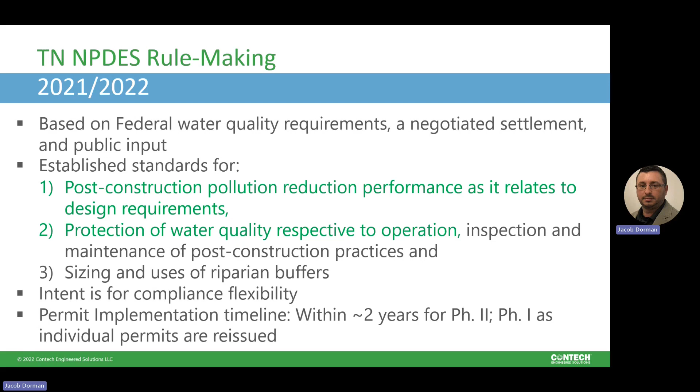As we start to get into what is in the permit rules, it's always helpful to understand what the agency's expectations are. We have some assistance readily available in that the Tennessee Department of the Environment and Conservation released their draft permit rationale with the draft permit in 2021 that provided some clarifying language related to stormwater control measures and how they can be classified, because how an SCM is classified is critical moving forward.

So instead of leaving things up for individual permittee interpretation, we can go directly to the permit rationale and establish where TDEC's expectations are. For this presentation and for designs moving forward, the key to keep in mind as it relates to the various SCMs available is that the vast majority of them can be classified by the treatment process on which they rely. That's why over the next couple of slides, we are going to take some time to dive deeper into how various categories of SCMs are intended to function, better understand those processes so that we ultimately know how they can be classified moving forward.

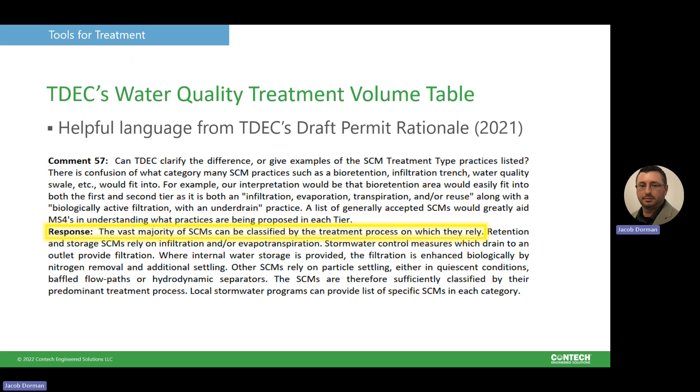And so that brings us to the water quality treatment volume table. This is a critical new piece of information that is included in the new NPDES rules. And not only does it establish the types of treatment, it also clarifies that there is a new statewide design storm, and that's going to be the 1-year, 24-hour design storm.

The design storm is variable across the state and is going to be dependent upon individual rainfall characteristics of each site. When Chris presents here in just a little bit, he's going to go into great detail on how we go about using that information. But I wanted to point out as part of this slide that we have now an established storm, the 1-year, 24-hour design storm, and that is going to be the storm we utilize to generate the amount of water quality volume that's required to be treated.

So how are we supposed to interpret this table? I like to think of this as a menu. As a dad of 3, we occasionally go out to dinner, and it never fails that not a single one of the children wants the same thing. That's really how we need to think about this treatment table. It's a menu. When our site allows us to do one thing, we can pick whichever treatment type works for us. When we run into site constraints, we simply have to choose from a different part of the menu.

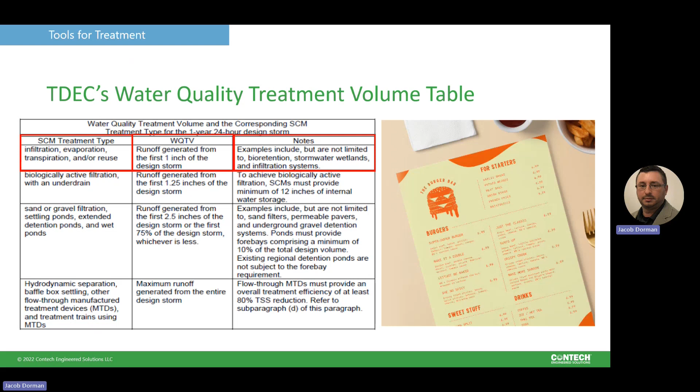Again, the takeaway here is that if your site has constraints that wouldn't allow you to use category 1, just the first category there, infiltration, evaporation, transpiration, then you simply choose a different category to pick an SCM from. You're going to have to deal with slightly different volumes, but it's not as if you don't have options when you run into certain site constraints. I think it's a really critical part of this table that we need to keep in mind.

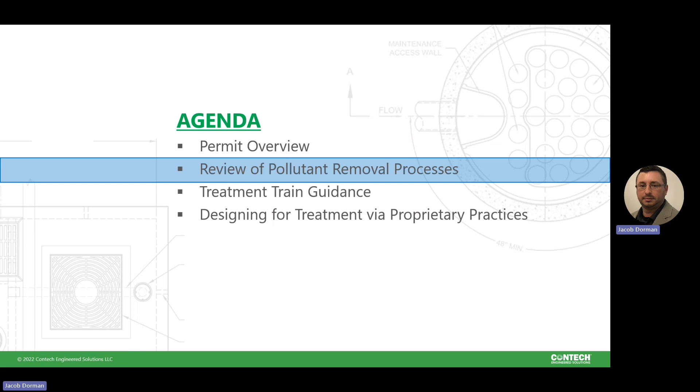So now that we've talked about some critical aspects of the permit, I think it's important we talk about how we go about removing or reducing pollutants. So let's now talk about the processes associated with the treatment volume table. So in this category, category 1, infiltration, evaporation, transpiration, and reuse. That's what we're going to be talking about now.

So this is a category that really mirrors sort of a natural water cycle. And what do I mean by that? The processes deployed in this category very much mimic what happens in nature. There's infiltration again - how are we getting runoff back into the ground? There's evaporation and transpiration, or ET - transforming that liquid runoff into a different state, meaning how are we getting, say, through the use of vegetation, runoff back into the atmosphere? This is water reuse, so we're reclaiming the use for something else beneficial.

And then another sort of good rule of thumb for this category is this is really sort of a capture category, more along the lines of a hydraulic or hydrologic process, in that there would be, using SCMs in this category, no discharge of runoff from your site when you're treating that first 1 inch of runoff. This makes practices that fully infiltrate a preferred first line of defense against polluted runoff. 100% of pollutants in runoff fully infiltrated are retained on site. This is the most effective way of eliminating runoff and addresses both water quality and water quantity concerns.

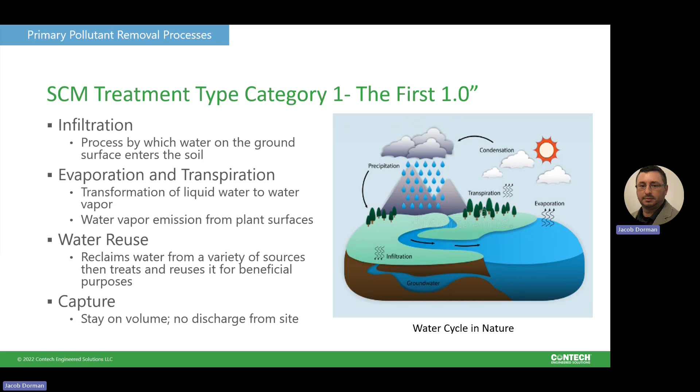So we wanted to take a second to also highlight what the dominant process within each of the categories is. So here we have infiltration. Within that first 1 inch category, infiltration is going to be the process that influences the runoff volume the most.

So what are the various influences on infiltration? The amount of precipitation that has fallen is an influencing factor. Whether the underlying soils have been compacted and have capacity to infiltrate the runoff we're putting through the SCM is a component that influences infiltration. The slope, so how fast runoff moves across a surface intended for infiltration, is a contributing factor, as well as land cover.

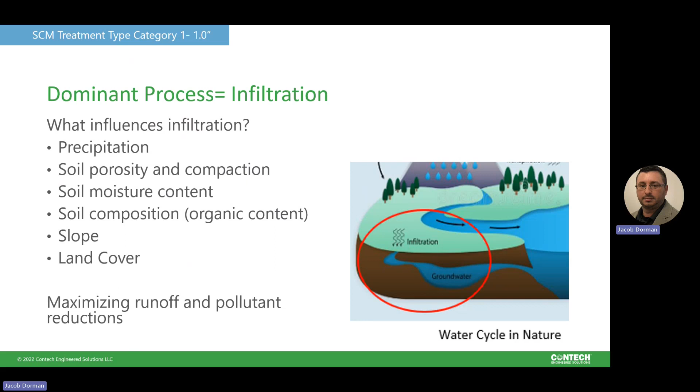Generally it's particularly influential if this is a redevelopment site, and if the land cover was previously something impervious, and we're trying to put an infiltration practice there, that prior impervious nature of the underlying soils is going to impact the ability of an infiltration-focused practice to function. At the end of the day, infiltration is primarily intended to maximize runoff and pollutant reductions, and where it's feasible, it makes a lot of sense.

So what are some key considerations when we think about applying infiltration practices on our site? The underlying soils must be capable of accepting the entirety of the volume that we're sending to that system. So we need to test for infiltration capacity under fully saturated conditions, and we want to avoid infiltration where underlying conditions of the soil affect its ability to accept infiltration.

We want to remove large sediment and trash prior to it entering an infiltration system, so we want to really pre-treat these systems. This is not only going to improve the longevity, but it's going to protect that filter media that treats the runoff before it infiltrates, because that media can occlude, and we want to extend its life cycle as best we can.

There are many studies out there that show how vegetation, again that ET aspect, helps with not just media infiltration rates, but also by breaking down and creating habitat along the root systems for microorganisms to live. What those end up doing is creating cavities inside of that media that help improve the infiltration rate.

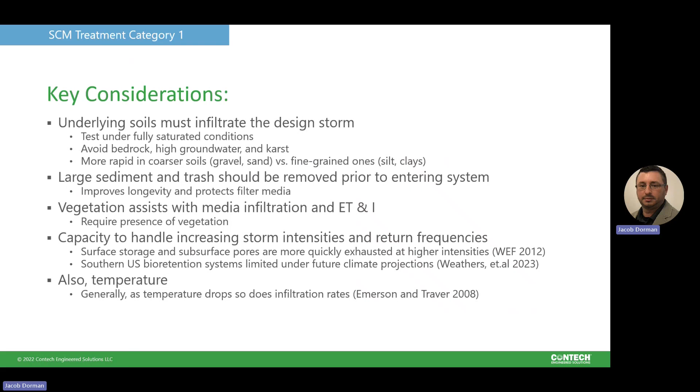We also want to be thinking, maybe not as the most critical feature of all this, about the ability of these systems, specifically infiltration-based systems, to handle future storm intensities and return frequencies. There's a great deal of new information out there that we're not going to talk about as part of this presentation, but that we'd encourage you to look at, that talks about how the southern United States is impacted under future climate conditions and what that may do to some of the SCMs we're selecting today as we look into the future.

So what types of systems or SCMs are we going to see in this category? This category is going to include bioretention without an underdrain, because we want to fully recharge that design volume. So this is essentially a 100% water quality volume.

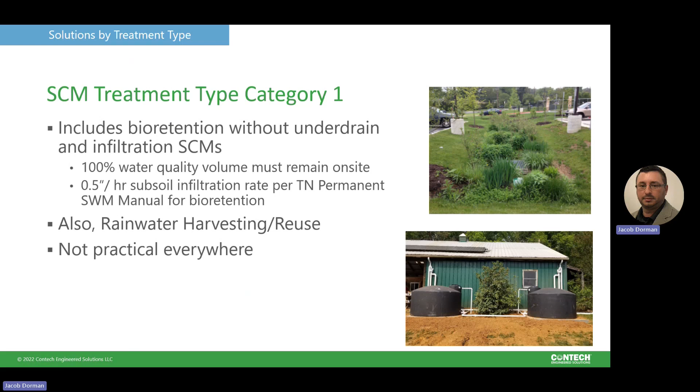We are also going to see rainwater harvesting and reuse in this category. And we need to recognize that while this may not be practical everywhere, we are not discouraging the use of infiltration type systems. We simply believe these systems are appropriate where the underlying soil conditions support their use. And if you run into a design situation where you cannot infiltrate, you are not penalized under the new permit. You simply select something from one of the other categories.

So let's move forward with looking at another category. This category is going to be biologically active filtration with an underdrain. It's a very specific category when you think about how the rest of them look. In this category, you are required to treat the runoff generated from the first 1.25 inches of the design storm.

Again, all of these are equal from a menu perspective. These are all entrees, and so this would be just simply, instead of steak, this is chicken. So what does this category discuss?

So what is the first 1.25 inch treatment category's primary process? In this instance, we're going to be looking at a filtering process that mixes some chemical and biological functions in there, which we'll talk a little bit more about here in just a second. But in all practical purposes, this means this is going to be bioretention that doesn't fully infiltrate. So in this instance, these are going to be bioretentions that have underdrains.

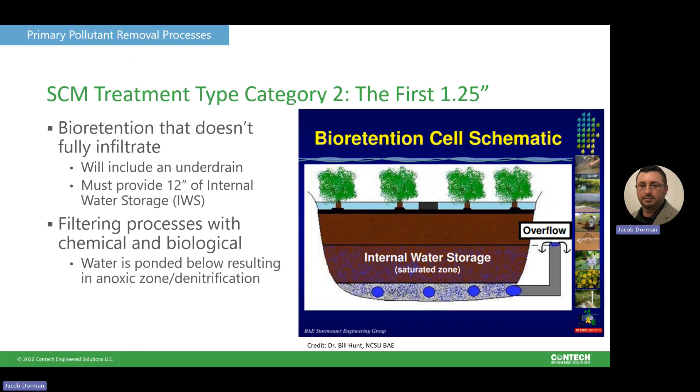The dominant process within this category is biologically active filtration, so we're not necessarily infiltrating the entirety of the design storm here. The primary mechanism for flow out of this system becomes this L-shape underdrain. So what are the things that influence the effectiveness of this biologically active filter?

The engineered media composition becomes critical. We need to do a good job of QA, QC-ing this media, because how well runoff flows through it and how quickly it gets to that internal water storage zone is helpful. The other piece of this is the depth of that internal water storage zone.

Another critical element within this category is the need for a vegetation or soil component. We've got to make sure that we have bio in the biologically active filtration.

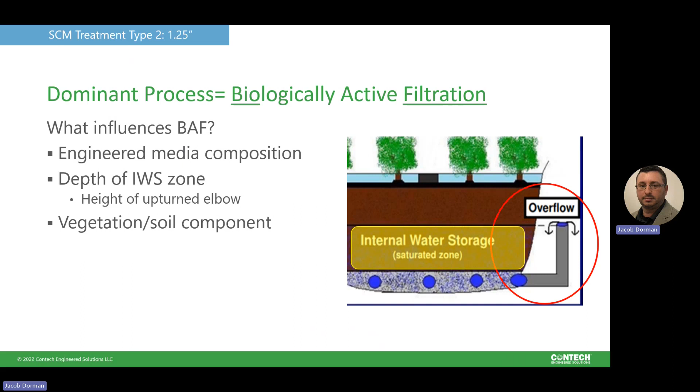So there's a couple of key pieces from a process standpoint that we wanted you all to keep in mind. The primary considerations here are going to be your media infiltration rate. We need to understand that that's relatively low for non-proprietary systems.

This is one where we start to see some proprietary systems, like some of the biofilters that manufacturers like Contech, being allowed because of their primary pollutant removal processes. Their flow rates are going to be much higher. The benefit of a proprietary system within this category is there's a fair amount of QA, QC in excess of what you typically see for non-proprietary systems, and that helps ensure that when those systems get installed, the media flow rate operates as expected.

There's also going to be a presence of vegetation or soil. There's that ET and infiltration benefit associated with that, as well as, like I described with the last category, you create preferential flow paths and microorganism habitat along the root zones of the vegetation. That is really critical to ensuring the media operates as expected.

There are distinct wet and dry zones within this category. The upper portion has to dry out between storms to be able to accept the next storm, which means we have to ensure adequate depth of that filtering media, because the wet elevation is set at the top of the invert for the upturned elbow, and everything below that remains wet.

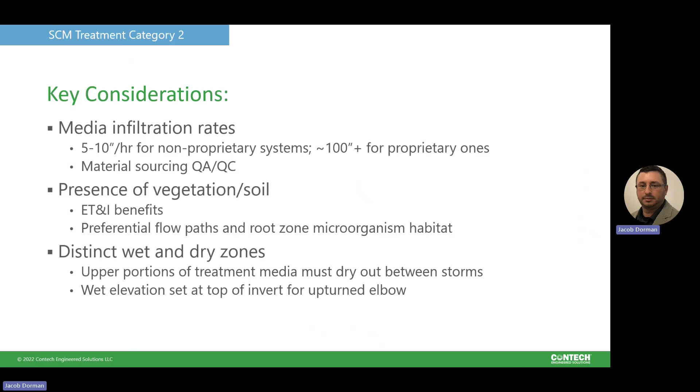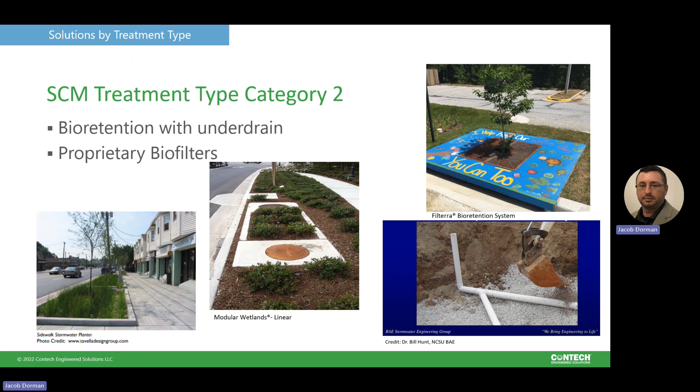So what are some examples of systems we may expect to find within this category? We're going to have bioretentions with underdrain, like you see in a sidewalk planter on the left, as well as several proprietary biofilters depicted in the center and on the right. We also wanted to include a picture of an upturned elbow in case you weren't familiar with it, so you could see how it's oriented and how it differs from a traditional straight pipe-out underdrain found in some current bioretention designs.

So let's move on to the third category. This is one where multiple processes are being deployed. This is the first change we see in the water quality treatment volume, in that this category is the first 2.5 inches of the design storm, or the first 75% of the design storm, whichever ends up being less. As Chris is going to demonstrate, that becomes pretty critical when we start thinking about the types of practices we deploy within this category.

But there are a number of examples in the notes section that should be referenced to understand what type of systems get included here.

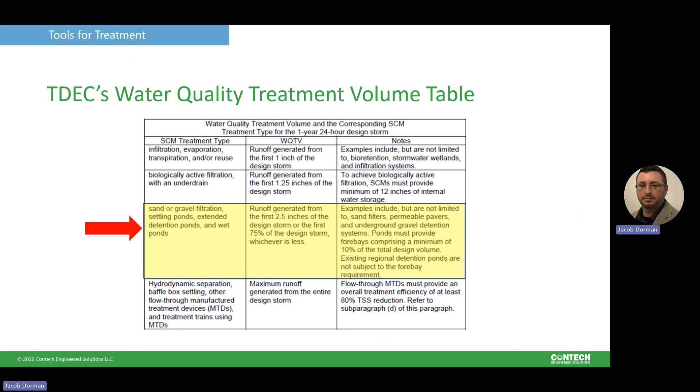So what is the treatment type category being deployed? There are actually two dominant processes deployed within this category. First, we have sand or gravel filtration, a process in which solids are reduced by a medium, generally a media blend or a membrane. And we also see that ponds end up in this category.

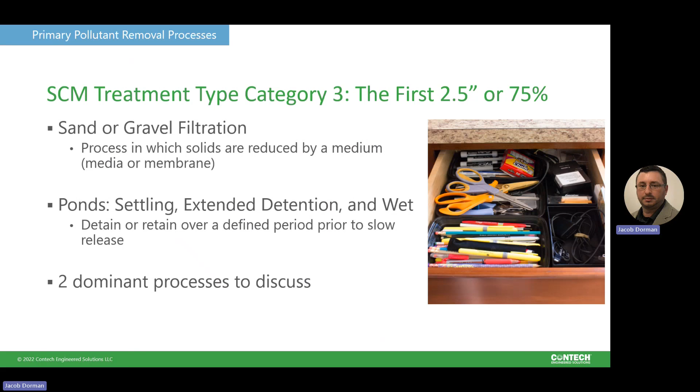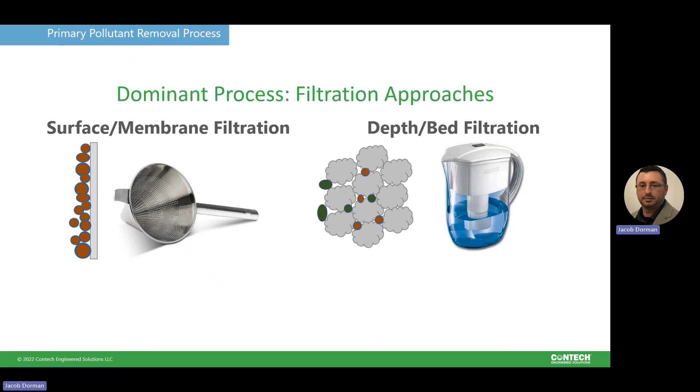On the right is depth or bed filtration, where the filtering happens inside the media matrix. There's interstitial space in there that sediment gets collected. Both of these can have high surface area, and that allows you to have some flexibility in your designs. So what are we talking about really when we're talking about these two types?

So what's a more detailed understanding of these? Inside this physical straining or filtration, we're going to have sand filters and perlite medias. We're also going to have membrane filtration - again, providing an inert physical barrier to collect solids. From a functionality standpoint, sedimentation plays a big role in the filtering effectiveness.

And what do we mean by that? The filter surface is going to have the sediment hit up against it, and that sediment then drops down to the bottom of the filter. Because sedimentation is playing a role, and this is an inert filter, we get really good results and control of solids and the pollutants that end up being attached to those - things like metals and total phosphorus.

What we don't get out of these systems, because it's inert, is there's no reactive media component, so we don't see a lot of dissolved or soluble pollutant removal in these. And like anything else, but specifically related to filters, longevity needs to be considered. We know all SCMs are going to need maintenance - all filters eventually occlude. It's important to understand the function of those filters so we know how and what role longevity ends up playing in these types of systems.

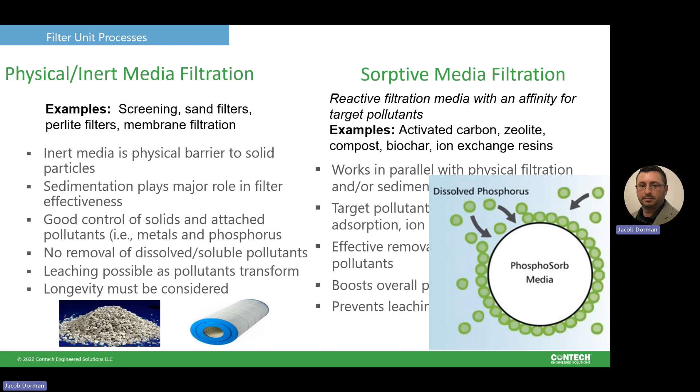This allows us to target the dissolved fraction of the pollutants we're trying to reduce, and it can often act as a polishing filter at the end of a treatment train to grab that other half of the pollutant. So we've got the particulate taken care of from the physical filtration side of things, and sorptive media can act as a standalone but can also boost that overall performance. An example would be Contech's PhosphoSorb media, which allows us to target the dissolved phosphorus fraction.

So what is the other dominant process at play in this category? When we're thinking in the pond sense, that dominant process ends up being sedimentation - reliant on gravity and time. That's why if we want more contact time for the volume of runoff we're containing to be in a pond, our pond gets bigger. This is characterized by Stokes' law.

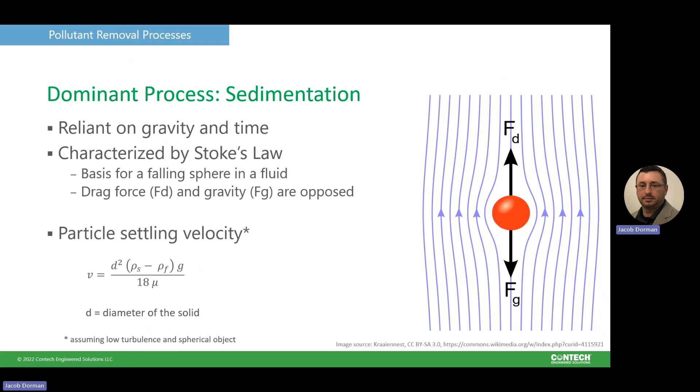How does a sphere fall out of the water column, essentially. That's really all based on how quickly the particles will settle, and that's going to be based on the size of particle we have in the system. So what are some factors that affect the ability for SCMs in this category to filter and settle? The contributing drainage area can be a factor - we don't want to overload our filters.

There's a general rule of thumb of about 5 acres for filters. We can handle more drainage area for ponds—ponds get bigger the larger the drainage area they serve. Both of these have distinct surface area needs. From a filtering standpoint, that surface area, while large overall, comes in a compact form, whereas with a pond we need a larger surface area, which generally means more land needs.

The type of media we're selecting has a significant effect on how effective these filtering practices are going to be. We need to make sure we can maintain these systems—all SCMs are going to need maintenance. All filters clog eventually, all ponds eventually fill up. We need to be able to assess or access these systems, and we want to think about how we can extend their life cycle. We have pretreatment needs associated with both practices that can help with that.

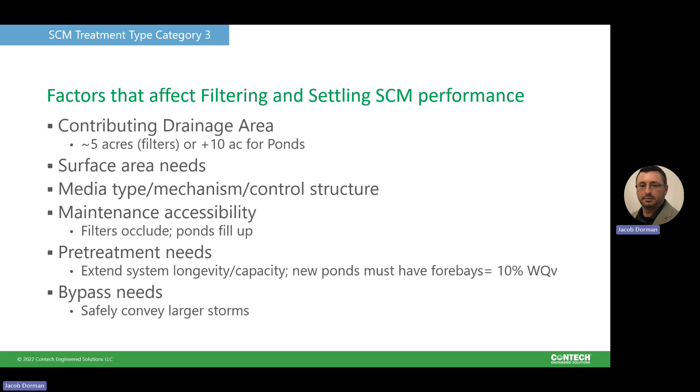In this example, the new rules actually say a pond forebay must be 10% of the water quality volume. So we're going to see manufactured proprietary systems, and we're going to see ponds with forebays as part of this category.

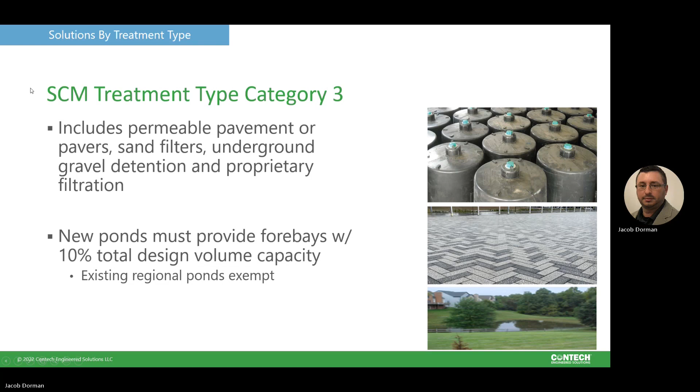Lastly, under this category, we're going to be looking at hydrodynamic separators—this falls under category 4. We're going to treat the max runoff generated from the 1-year storm. This is not all manufactured systems; this is a very specific type within the manufactured suite of products.

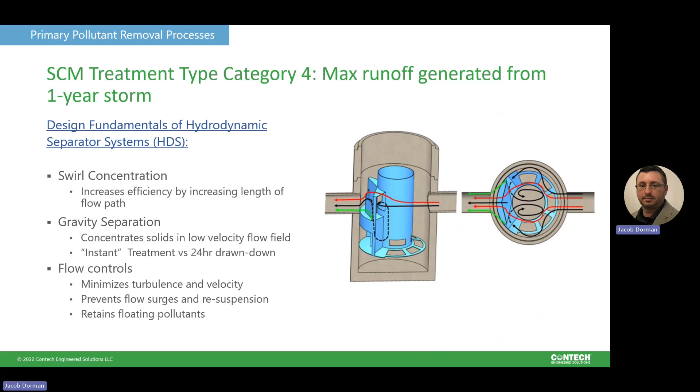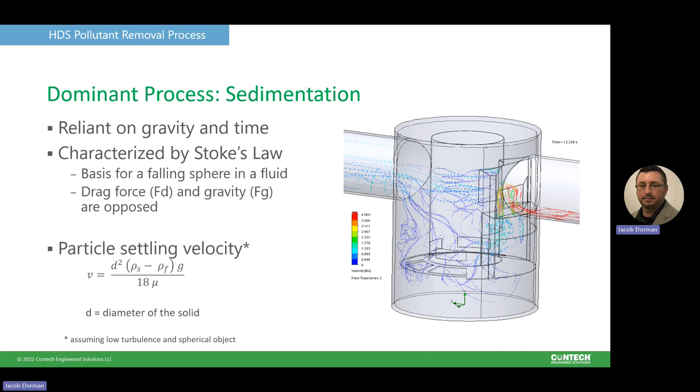What are some of the factors that affect HDS performance? First, we want to make sure these are tied to an appropriate flow rate—we don't want to undersize these systems. All of that should be tied to some kind of performance testing, and the rule reflects the need for an industry-wide standard to be used. Sediment particle size also affects HDS performance: these systems are really good at large sediment removal but less efficient at finer sediment.

Residence time becomes a pretty critical factor in all of this. The longer you can make the flow path, or the more time the sediment has in the system, the more sediment can actually fall out. We also want to make sure these systems have passed some kind of scour test, so we don't resuspend and potentially lose captured sediment.

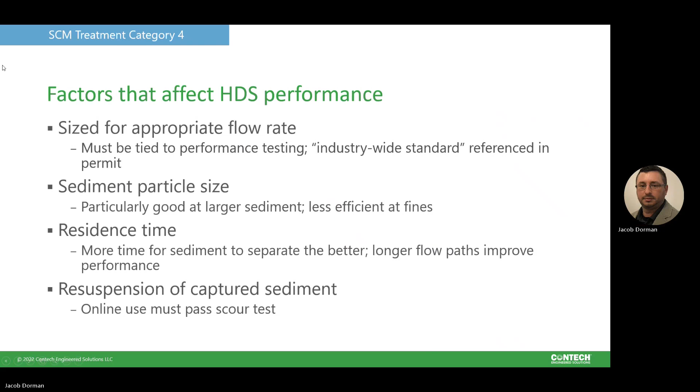Another key piece of this category is that if you are utilizing an industry-wide standard as required by rule, TDEC has defined an industry-wide standard as either the program from Washington State, the Technology Assessment Protocol Ecology, or the certification program from New Jersey, the New Jersey Department of Environmental Protection's certification. Those have a ceiling of 50% for these types of practices, which would keep them below the minimum 80% requirement and therefore not allowed to be used as standalone systems.

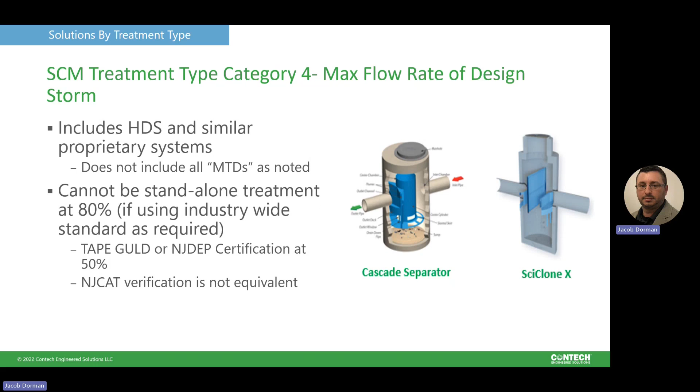We also want to talk about treatment train guidance here. This is particularly important as we talk about how we're going to use hydrodynamic separators moving forward. This is that fourth category. By rule, we have a minimum of 80% TSS that we're trying to achieve. That is now the rule, but that's kind of the target. And this treatment train using HDS describes how you can achieve that.

The key consideration is that distinct unit removal processes are needed to create effective treatment trains. That means two of the same HDS systems in sequence are not going to create additional performance for your system. Good engineering practice should prevent two HDS systems from being lined up to try to achieve this treatment train result for 80% TSS. In fact, if you went so far as to try that, you would actually need 3 HDS systems. But again, that's not the intent of the rule, nor is it sound engineering practice. We need distinct unit removal processes to create effective treatment trains.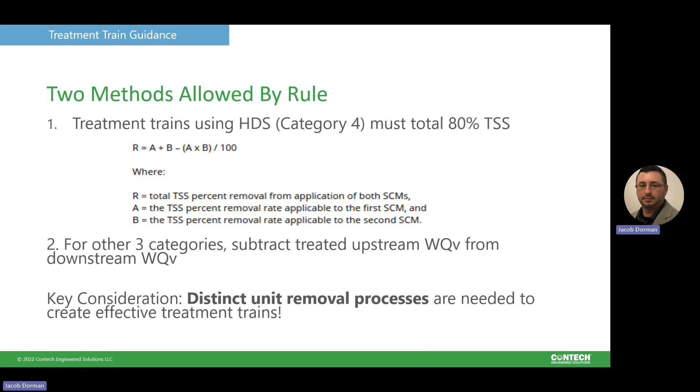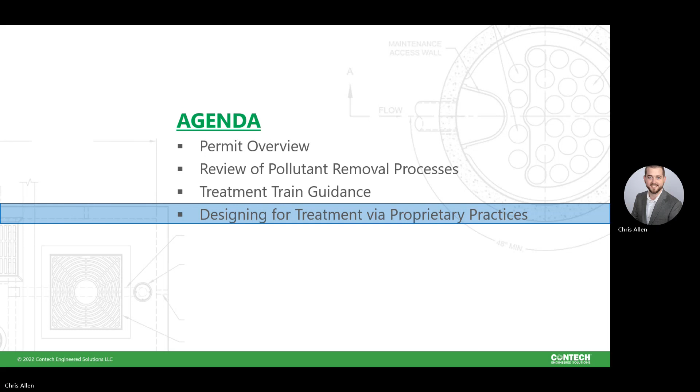Now that Jacob's laid an excellent foundation for us in understanding all of the key parts of the new water quality treatment table and all the different SCM treatment types, I'm going to take that one step further, and we're going to go through the important considerations when designing for treatment with proprietary practices in mind. As previously shown in this presentation, Contech has a vast portfolio of solutions that can meet each of these SCM treatment type categories. Therefore, I'm not going to go through the intricacies of each design because it can get very site specific. Instead, I'm going to take broad strokes and discuss how we might calculate things like the water quality treatment volume, or convert that to a flow rate that then can inform our design procedures for each of the types of practices we may be selecting to meet this table.

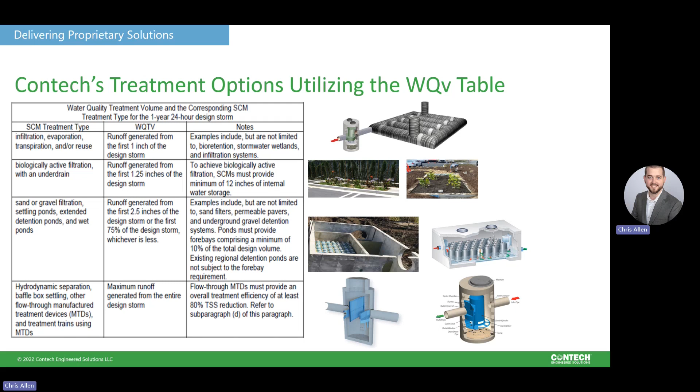To meet those requirements, I kind of see us as needing 3 components. The first is the water quality design storm, clearly defined here at the top of the table as the 1-year, 24-hour storm according to NOAA Atlas 14 data sets.

Building off of that, we have the water quality treatment volume, and this is how much volume we need to ensure that we're capturing by our SCM for treatment, to ensure that we're meeting the treatment goals outlined by this new permit. That volume is defined as the runoff generated from a portion of the design storm, depending on what practice you've selected, and also the runoff generated from the impervious surfaces - that's really all we're considering here relative to the water quality volume. We'll keep that in mind as we're doing our design calculations in the rest of these slides.

Finally, the third component, and perhaps the biggest component, is making sure that we're designing stormwater control measures to achieve a full treatment efficiency of at least 80% TSS removal from that volume. Therefore, if you're using a treatment train, the sum of that treatment train calculation needs to equal at least 80%.

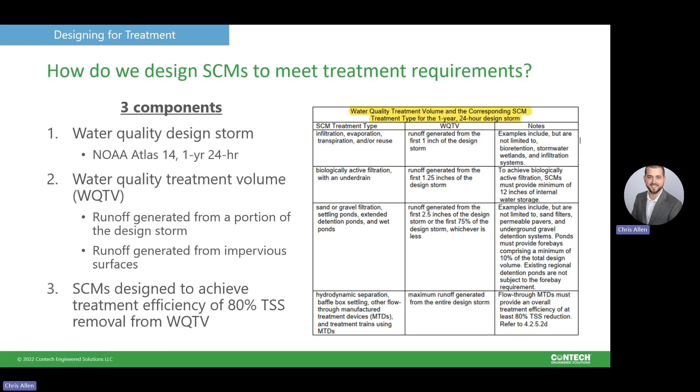So when we are defining our water quality treatment design storm, I find the quickest and easiest way is to visit NOAA's website for precipitation frequency data server using the NOAA Atlas 14 data. From there, I'll select the state - in this case, Tennessee. Then we're faced with a screen very similar to the one I've got shown here. The first option we're presented with is to either select precipitation depth or precipitation intensity as far as the data type it's going to produce.

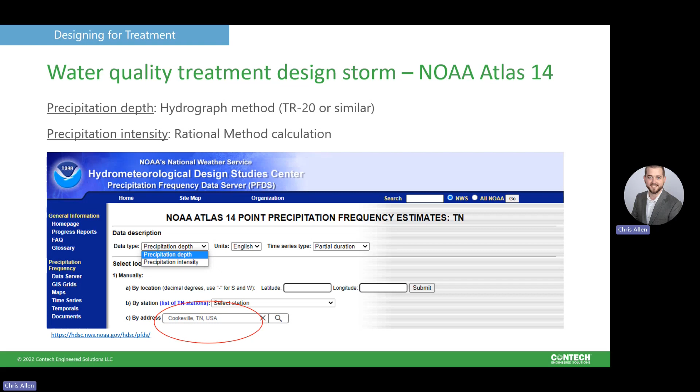Which one you select is dependent on what type of design method you're planning to use for defining the hydrology of your site. So if you're going to use the hydrograph method like TR20 or something similar, you're going to need a precipitation depth. If you're going to be using the rational method calculation, you need to select precipitation intensity. Pretty straightforward. From there, you can also dive down into a more local area or rainfall station. In this case, I'm just going to be using Cookeville, Tennessee to generate my numbers as an example.

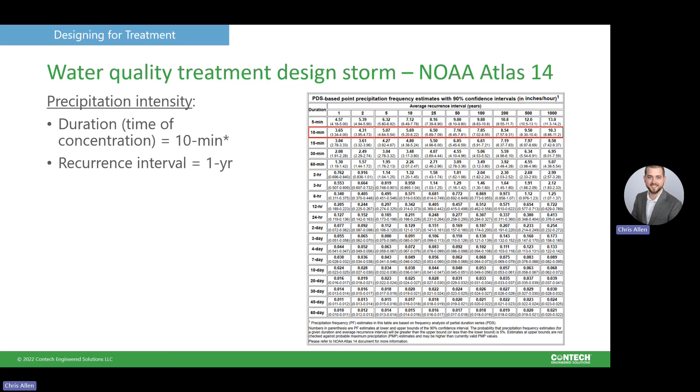If we're going to be using the rational method, we then can look at precipitation intensity instead. The key difference here is the duration we're selecting is not the duration of the design storm, rather it's the duration of the time of concentration for the specific watershed in question. So for sake of example, if we have a 10-minute time of concentration on this project, we'll select 10 minutes instead of 24 hours. Our recurrence interval still is 1 year, and that shows us we are going to be using 3.65 inches per hour as our design storm intensity in the rational method equation.

This is important to know that the duration is based on time of concentration and not the duration of the design storm, because if you're going to use the duration of the design storm at 24 hours, you're going to be using an intensity far lower than we actually need to be treating, and you're not going to provide the required amount of treatment at all. So it's really important to get that part right if you're using the rational method.

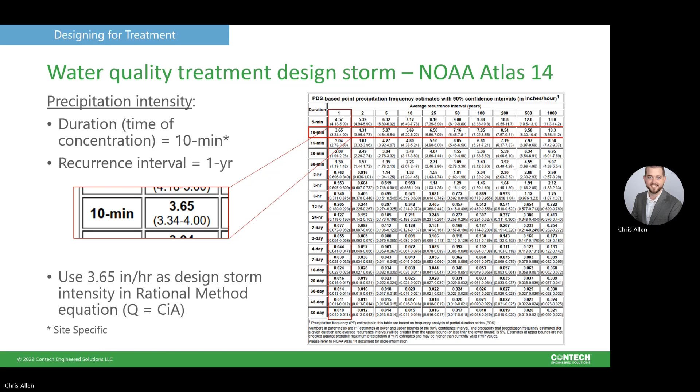So very easy, and then precipitation is variable based on whatever SCM treatment type we select. So if we're using a row 1 infiltration type base, we're going to be selecting a P of 1. For row 2 would be 1.25. For row 3, we have the option to either select the first 75% of the design storm depth or 2.5 inches, whichever is lesser. So we know our full design storm depth is 3.05 inches from previous slides. 75% of that is 2.29 inches, which is less than 2.5. So we're going to be using 2.29 inches as our precipitation depth for this row 3 practice in Cookeville. And then obviously for our row 4, 3.05 inches.

So then we can take those P and S values, calculate our runoff in Q, and we'll take that runoff depth, multiply it by our watershed area. So for example, a 1 acre site, 1 acre multiplied by your runoff depth is going to give you a water quality treatment volume. You just need to make sure you're converting your factors appropriately. I'm going to use factors appropriate to result in cubic feet.

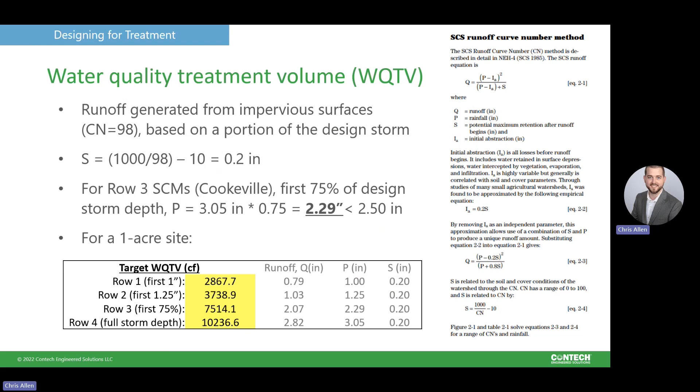Not all SCMs are designed on a volume basis for volume capture. Sometimes they're designed based on how much flow rate you're passing through them. We call those flow-based practices. And in those cases, we need to convert the water quality treatment volume to an equivalent flow rate.

And doing so really requires us to use one of two methods, whether we're using a hydrograph method or the rational method. Now, personally, I recommend the use of a hydrograph for all 4 SCM types, but if you would like to use the rational method to calculate your maximum peak runoff, the rational method is mostly applicable to row 3 and row 4 practices, for reasons which I'll explain in the next couple slides. But personally, I do prefer to use a TR20 hydrograph method for all of them because I find it makes it most simple for my calculations. But you can be the judge of that on your own projects.

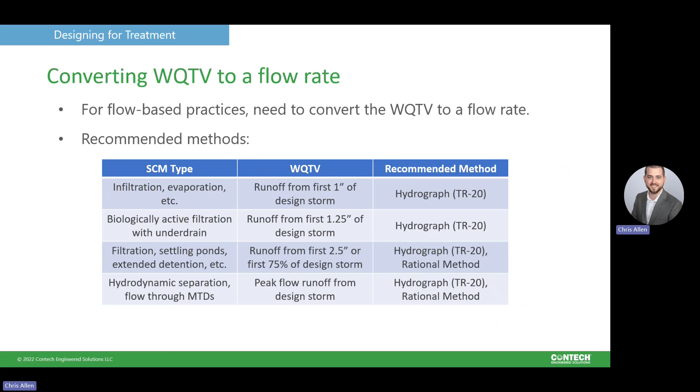So in order to convert that water quality treatment volume to a flow rate, we need to create a hydrograph, at least for this first method. I'm going to go through the hydrograph method first because I find it mostly applicable.

In order to create this hydrograph, we need a rainfall distribution, because we need to know how the rain falls in the project's geography, since rainfall is quite temporal. Historically, we used the NRCS Type 2 method in Tennessee, but that's not compatible with NOAA Atlas 14 rainfall data - it's quite conservative. So we should be using this newer Ohio Valley distribution that I've shown here, grabbed from the National Engineering Handbook.

This shows us the NOAA A, B, C, and D distributions. In Tennessee, we're only seeing A, B, and C on this map, so I've included a graph of rainfall depth versus time for each of those three. For Cookeville, we're in the blue zone, so that's the NOAA B distribution we'll use to create our hydrograph.

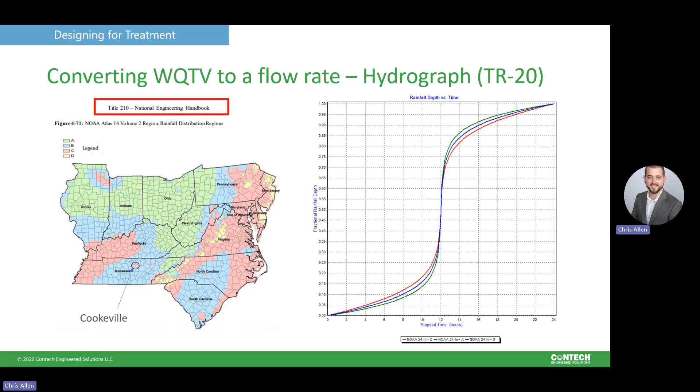So we have all these site inputs, and we'll plug them into whatever software we're using. In this case, I'm using HydroCAD. You can use whatever TR-20 software you might be interested in using, but for me, these printouts are going to be HydroCAD printouts.

So we have our site characteristics of 1 acre, curve number 98, time of concentration 10 minutes, all this stuff we've talked about before. Rainfall characteristics: we're using a NOAA B rainfall distribution, and a full precipitation depth for the design storm of 3.05 inches.

You might be tempted here to put in either 1 inch, 1.25 inches, or 2.29 inches as your rainfall depth, but that would be incorrect. We need to create the full design storm hydrograph in order to calculate the equivalent flow rates for the top 3 row practices, and I'll show you why in the next couple of slides. The language is very specific in the water quality treatment volume table - it says the runoff generated from the first 1 inch of rainfall. So that means we need to generate the full design storm curve and then partition out the flow rates equivalent to the target volume.

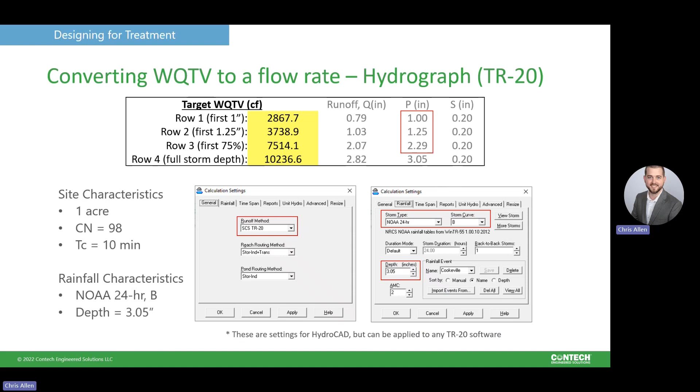So we put all these site inputs into, say, HydroCAD, and I would get this sort of printout. For this project example, my peak runoff is 3.10 CFS for the maximum, 1 year, 24-hour design storm. That peak runoff is what we would target for a row 4 type practice.

You can also see here I've got some additional information that confirms my previous calculations for water quality treatment volume. For example, total volume being 0.235 acre-feet, that's just a little over 10,200 cubic feet, which does match our previous SCS curve number runoff method calculation. All right, so we've generated this design storm hydrograph.

We need to then find out where on this curve does the first 1 inch, first 1.25 inch, and first 2.29 inches of rainfall occur. So the way I do that is I look at the runoff depths, because I can get the printout of this hydrograph for runoff corresponding to runoff depth, and those runoff depths will then correspond to a runoff rate. For example, a runoff depth of 0.79 inches for that first 1 inch of rainfall corresponds to a runoff rate of 0.63 cubic feet per second on the rising limb.

The area under the curve to the left of the right vertical red line, that area under the curve corresponding to 0.63 CFS, does actually match the water quality treatment volume we calculated before.

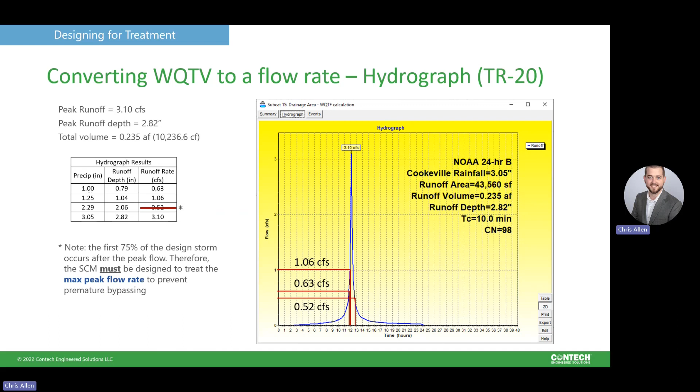What this means is we can use the rational method for row 3 and row 4, because we can't partition the flow rates for the rational method like we do for the hydrograph method.

So in this case, we have runoff generated from impervious surfaces, resulting in a C value of 0.95. We know our intensity from previous slides as being 3.65 inches per hour, and also our acreage of 1 acre. All that multiplied together shows that our maximum peak flow rate based on the rational calculation method would be 3.47 CFS, just a little bit over 3.10 that we generated from the hydrograph.

And those are the key components to wrapping up your SCM design. Once you know your volume you're targeting and your flow rate, you can then select an appropriate stormwater control measure that is designed to meet those inputs, and then from there, build into the rest of your site design hydraulics, etc.

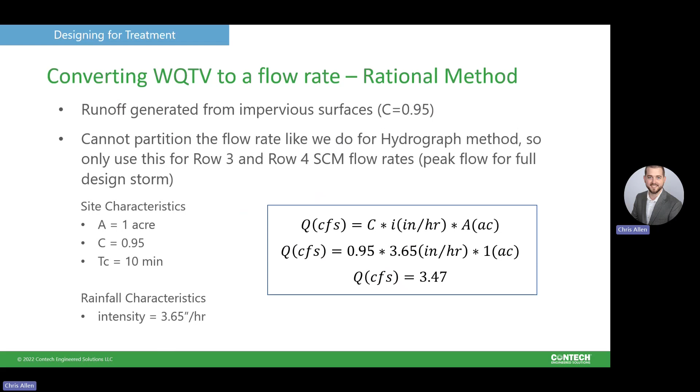One key component of the policy, the new permit, is that maintenance of SCMs is definitely required. The rules state that SCMs must be designed to provide full treatment capacity within 72 hours following the end of the rain event for the life of the project.

If we don't maintain our SCMs, proprietary or non-proprietary, eventually their performance is reduced. If the performance is reduced, we're no longer meeting the rule requirement to provide full treatment capacity. So maintenance is important and must be done for all SCMs.

So we would encourage NPDES to develop and implement SCM maintenance procedures, as part of their rule implementation.

But also, it's important to consider maintenance at the time of design. Because if you're considering your maintenance access, if you're considering maintenance frequency, maintenance cost, the tools you might need, all these things are really helpful in choosing the appropriate stormwater control measure for your site. Because if you can't access it to maintain it, it's probably not a good solution. So we really should be thinking about maintenance at the time of design.

We have on our website a lot of maintenance guides that can be used to inform those decisions. Also, I think that legally binding maintenance agreements could be appropriate wherever it's applicable to ensure that owners who are taking ownership of a site will continuously provide the maintenance that is required to ensure that our water stays clean.